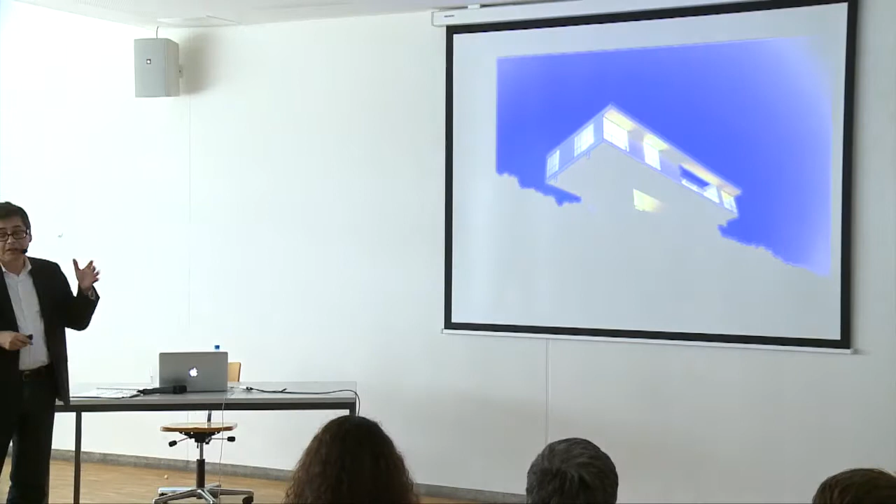To begin with, this is actually the very first house that we did in Los Angeles, on a very steep site - these are the pieces of land that you can get. We built a house that sits on two concrete towers. The two towers contain all of the infrastructure - power, water, heating - going up and down through them. The towers carry two steel beams, which carry a wood platform, and the whole house is framed in wood, the predominant way of construction in Los Angeles.

The house is covered on all sides, including the bottom, in Eternit panels. This is what the house looks like from afar. It's organized around a series of volumes that all contain storage - this is the garage, for example, or bathrooms - so that the space continues to flow around them, creating public and private spaces.

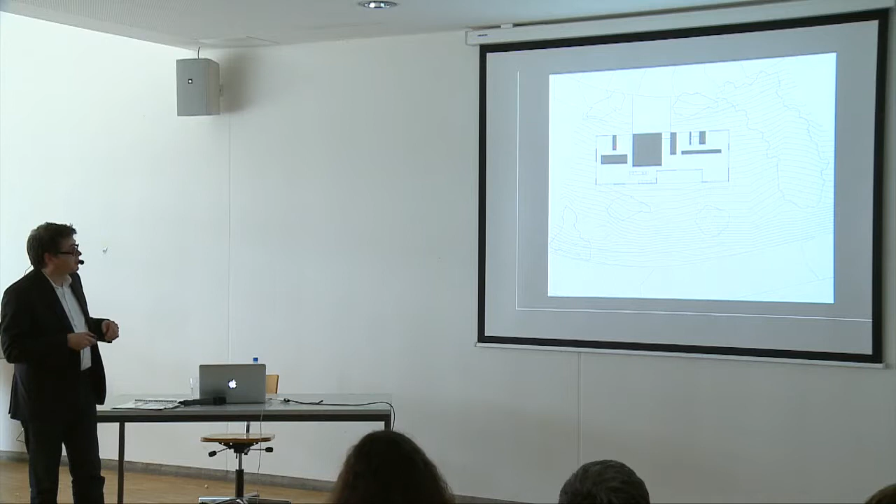Views of this public space from one end to the other. This is actually the garage. Again, these first ones I'm just going to show very quickly without going into too much detail.

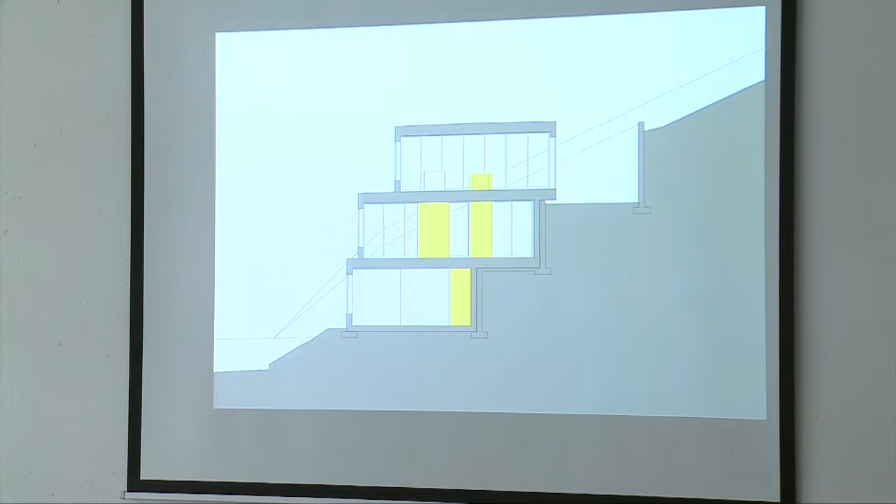A second house is one we did in Mount Washington for a young artist and an art historian, called the Sola Wright House - again a very steep site. Here we did sort of the opposite strategy: we excavated these steps into the site with concrete walls, on which we then laid three tubes. The tubes are entirely framed in wood, so there's absolutely no steel in them. The size of the tubes is dependent completely on the program.

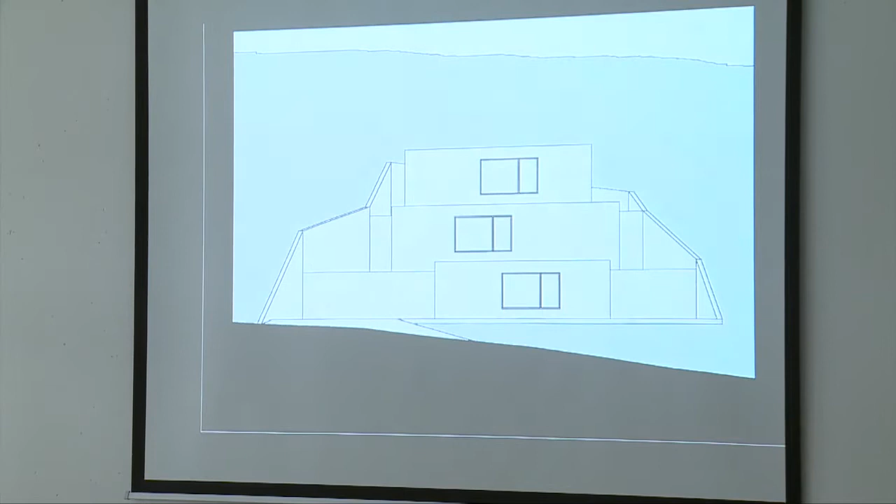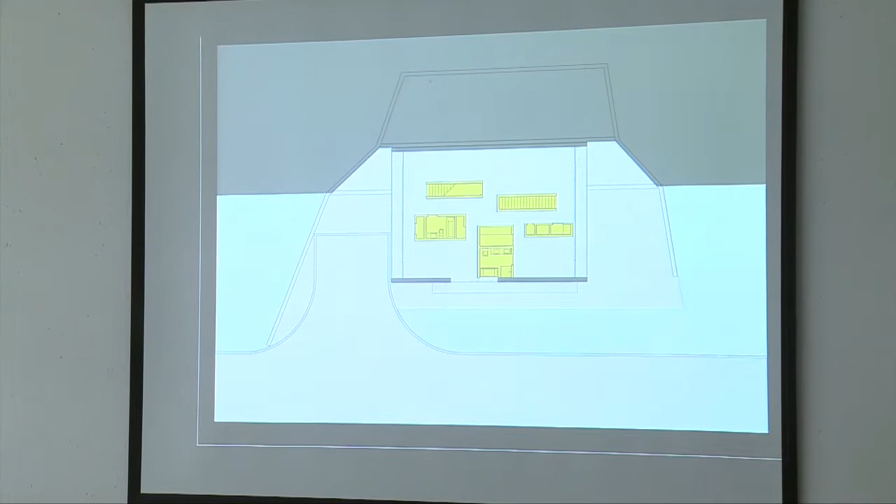The lowest level contains a garage, now used as an art studio. The second level contains a library, bedrooms, and again bathrooms encased in these volumes. You enter from the lower level, come up to this point, then move through the whole length of the building to the stair, and go up - so moving to the top of the house means you move both vertically and horizontally through the entire house. At the top floor, we have an open living, dining, kitchen space.

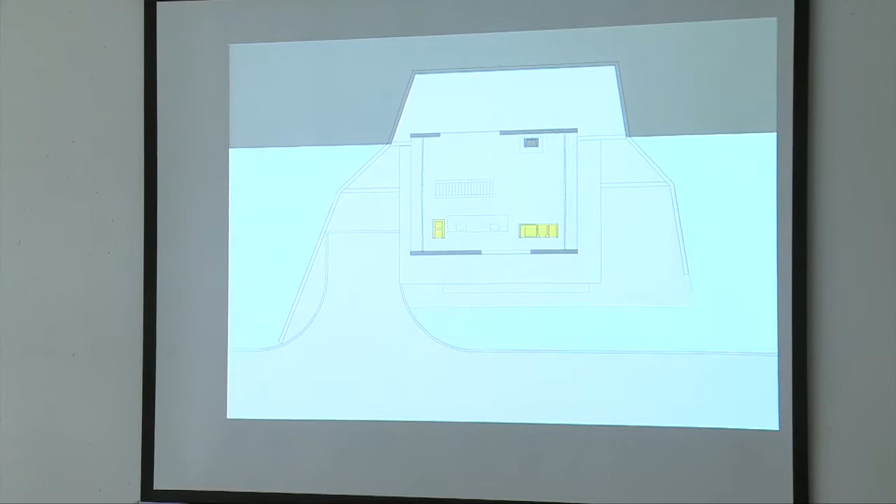These volumes contain infrastructure, they contain structure, and they are the shear panels of the building. Again very quickly: the approach, the entrance going up to the middle level, this is the hallway I showed you. The floors, ceilings and walls are all treated in white. The idea was to emphasize this tube, and within it we have these wood boxes set in there, floating in the space. Then at the top level, this living space.

A very recent house we did, which we call the house with 5 corners, on a very difficult site with very narrow access and very steep terrain. There's a level area, and you see this cliff. This is the site of a water tank that existed here for decades, and our clients bought this piece of land. Various restrictions from planning, distance from the cliff, distance from the lot line, and so on, actually dictated this overall shape, this form.

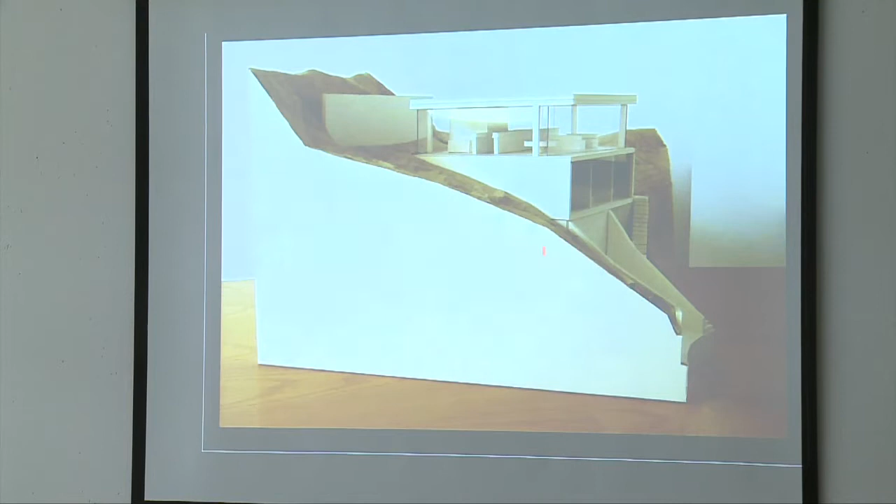Most of the house is actually underground, and all of that is poured-in-place concrete. At the top floor, we have a pavilion with 5 sides of glass, which is the living, dining, kitchen space. So this is how you enter into the garage, or you go up the stairs to this level. On this level, you have the 3 bedrooms that look out towards the view. Then on this top level, where you have access to the garden, you have this living space.

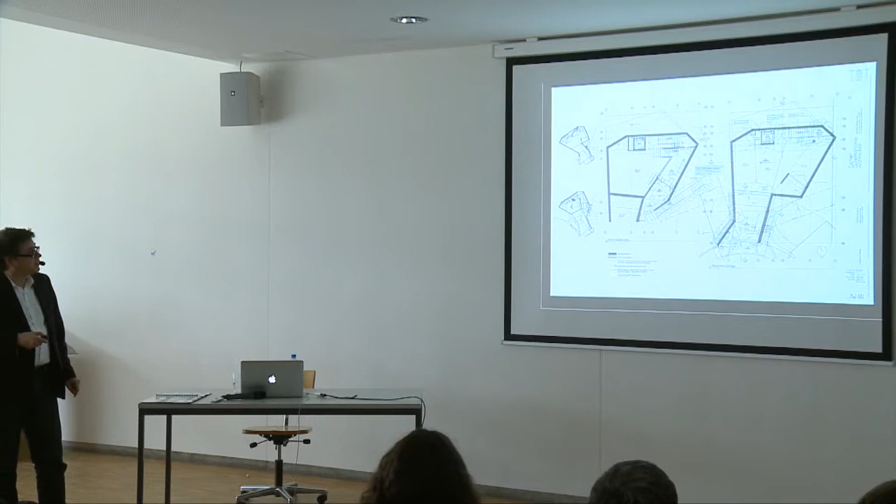Very quickly, the plans: again, garage, you go up the stairs. This is a mezzanine with the entrance that leads to a stair that cascades through the entire house. On the middle level, you have access to these bedrooms, which have access to bathrooms behind this core. And you arrive at the top into this dining, living, kitchen space, with a study here. The roof then sits on these 5 massive steel beams.

These images are very dark, but this is a view looking back. Going into the house, you see the contrast of the concrete versus the wood-clad inner walls, going up the stairs.

I'm not sure if they're extremely dark, these images, but I'm not sure if there's anything that can be done. Should you? Okay. You have to imagine them a little bit brighter.

So we go up the stairs to this middle level, view into the bedroom, up to the very top, and this top level where you have a view of the city. Here you would see this outline of the roof sitting on these 5 steel columns.

Another early project we did was actually a tanning salon, which I think in French is a salon de bronzage. When we first were approached, we thought, how can one do something like that? But then we discovered that the beds actually produced incredibly beautiful light, and different models produce different colors of light. We decided we were going to use the light as the only decoration in the whole space.

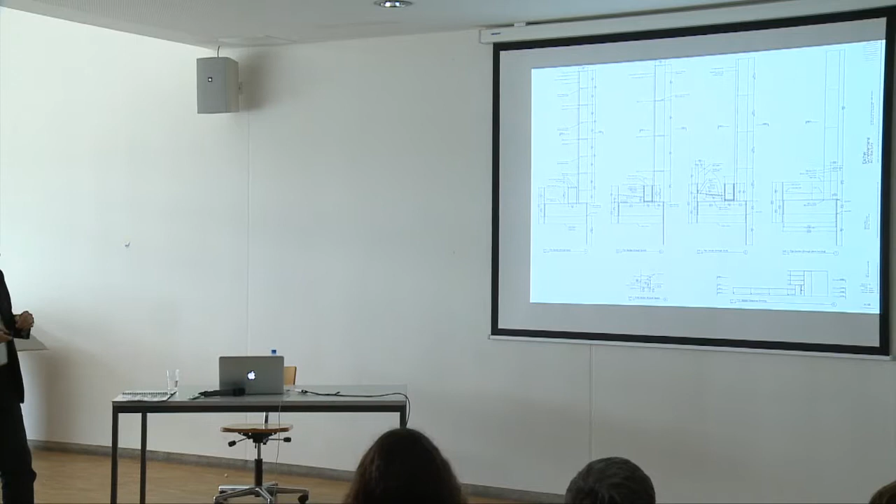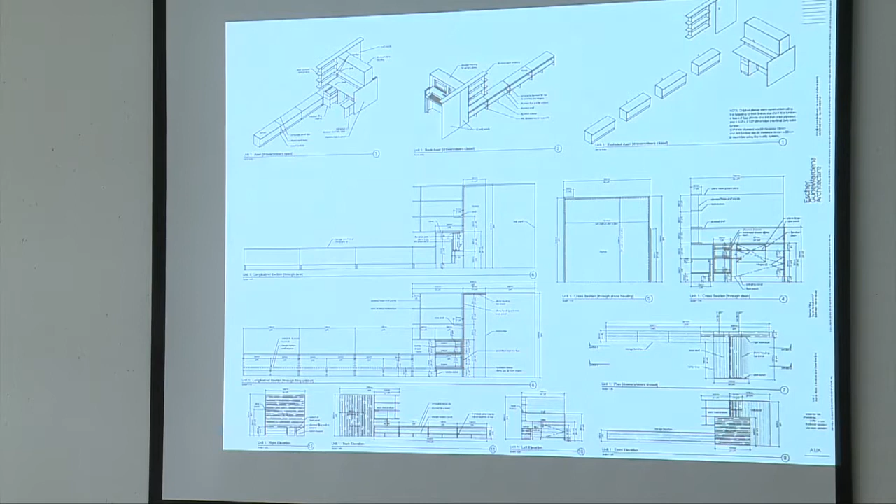Stephen Prina then first stained them in the way the furniture was originally stained. Rudolf Schindler had this idea that the furniture should, in a way, reflect the nature around the building, so these green tones, or silver-green tones, were slightly different from one house to the other. Once they were all stained, he painted them pink. So this is what they looked like in the end — he installed them basically as pieces of sculpture.

They were no longer defining space, no longer meant to be part of a building, but simply pieces of sculpture. He installed them on a very strict grid, determined by alphabetic order. Furniture from the Harris House preceded furniture from the Hyder House; furniture in the bathroom preceded furniture in the bedroom. He developed a very strict catalog and installed it on this grid.

This was at the Secession in Vienna. It was later shown in Los Angeles at LACMA as one of the Pacific Standard Time exhibitions dealing with architecture in Los Angeles.

Franz mentioned John Lautner—this is a very grimy picture of the Chemosphere. I started working on Lautner's work around 1992, a few years after I moved to Los Angeles, and edited the first book on Lautner. He died around the same time the book came out, and his family set up a foundation and donated the archive to it. I became the administrator for the archive, looking after this material for years until 2007, when it was acquired by the Getty, where it now is. The Chemosphere is probably one of Lautner's best-known houses, and it was acquired in the late 1990s by German publisher Benedikt Taschen, who asked us to restore the house.

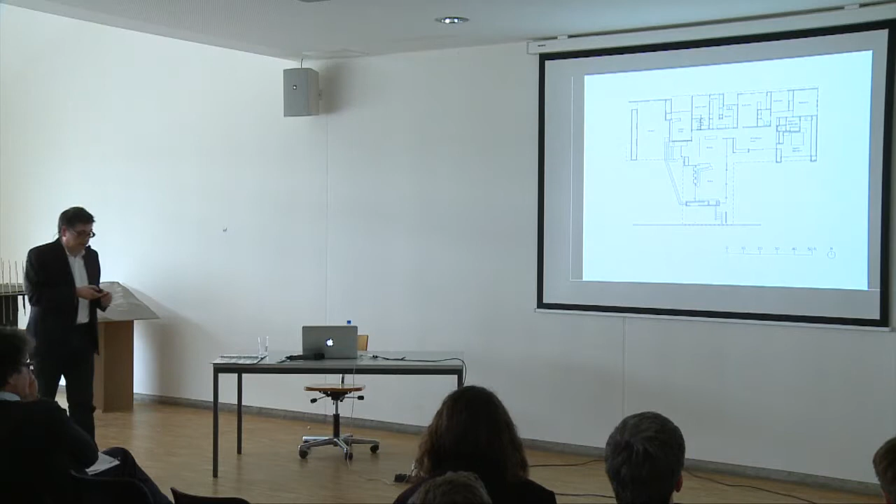The biggest change was that the house was originally designed for a family with a housekeeper, which was not how our client was going to be using the house. So this kitchen area, originally completely separated from the house, needed to be connected—you'll see that in a second.

Some of the work we did here was really restoration work. We had to replace all of the glass. We did not want dual glazing, but instead laminated glass. We had to replace flooring materials and some of the infrastructure.

This is looking into this living room space, looking back. Furniture had to be reconstructed, including the built-in upholstered furniture. And this screen here—you saw the black and white photo of it.

There were originally two of these screens, one here and one in the back, separating the dining room from the kitchen. This was one of the things our client needed or asked us to change. But there is this very important wall that runs the entire length of the house, this oak wall, and it was important to us to respect and maintain that.

What we designed was a 20-foot wide panel, part of this wall, that slides open so one can connect the dining room to the kitchen. This is what it looks like closed, and open. We redesigned a kitchen that was not meant as a kitchen for a housekeeper, but really a kitchen that was part of the living space.

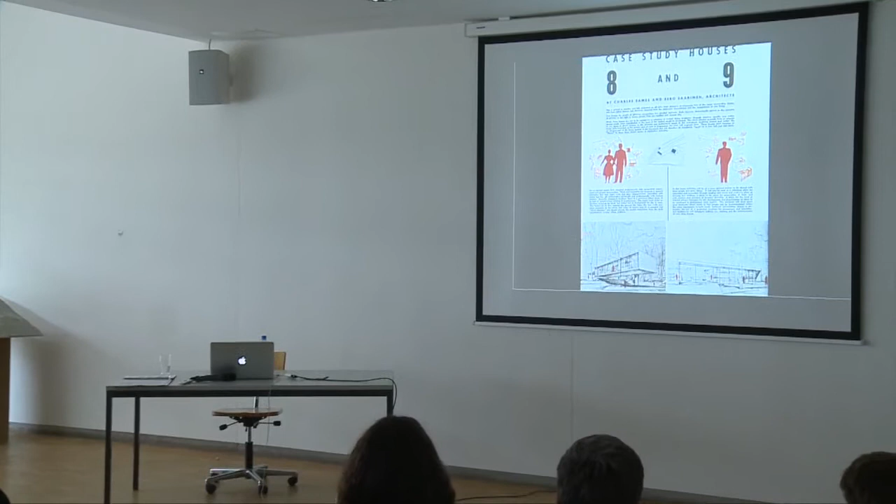Right next to the Eames House is the house John Entenza himself had. This is the site with the Entenza house, a collaboration between Eames and Saarinen. And this is the original design for the Eames House—originally they imagined it as a bridge cantilevering from the hill through this row of eucalyptus trees that dominated the site.

They didn't build the house for many years, and once they started, they realized this meadow was something very important to them. They repositioned the house and set it very precisely at the bottom of the hill, between the toe of the hill and this row of eucalyptus trees.

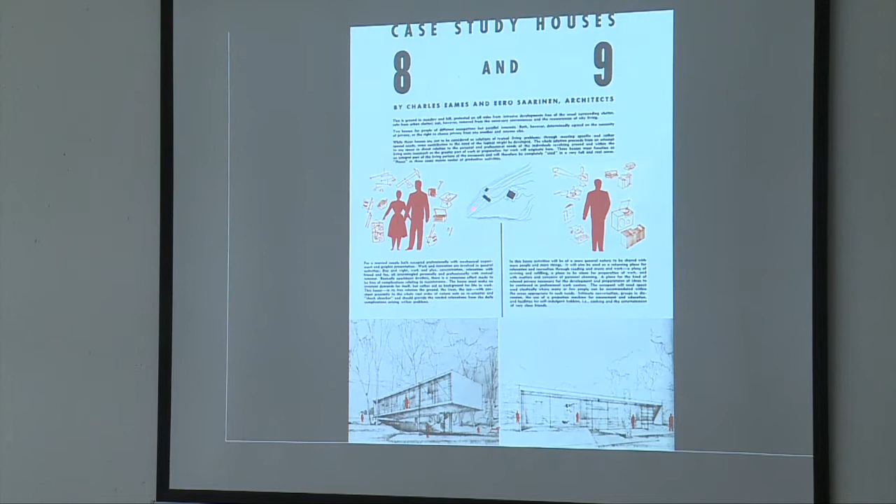This is the famous photo of the Eameses constructing the house, as it looked when it was first finished, and an interior view of the house. Now, the house, in its 60 years, had aged like any other house would age.

Though it was actually in relatively good condition, you have to remember that the house was very carefully designed, very carefully built, and very carefully lived in. The family continued to own the house.

Ray Eames died in August 1988, 10 years to the day after Charles Eames died. When she died, Charles Eames's daughter, Lucia, took over the house, and she is the one who set up the foundation that now owns the house.

The idea was really to preserve the house, which was something that at the time no institution would warranty. When the Eameses came to us to discuss the conservation of this project, we spent the first part just looking at this house very, very carefully.

We discovered in the house various damaged areas, of course, but we also discovered things like this. These are metal panels that have these sort of very delicate cracks and this crazing. And it was at that point that we told them that we should treat the house as if it were a valuable painting.

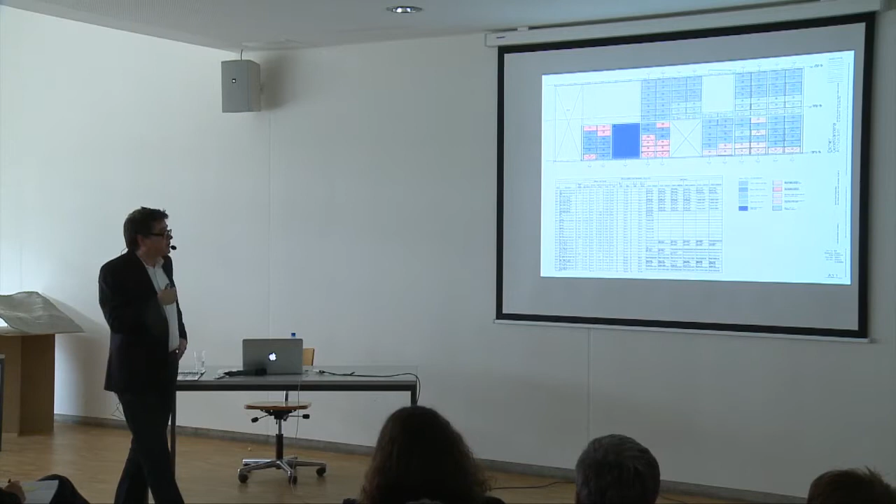In the 1994 earthquake that we had in Los Angeles, about 40 panels of glass were destroyed, and they were replaced. So in addition to these 4 different types of historic glass, we have three different types of relatively new glass.

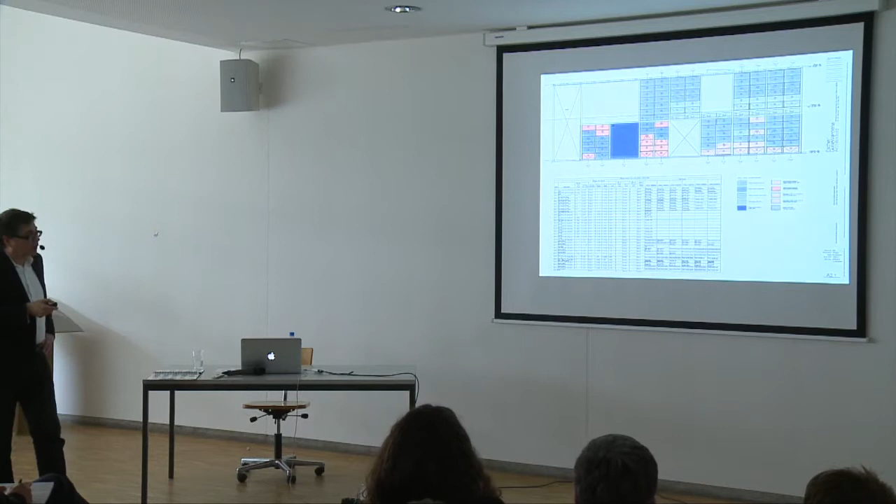So what you see here is mapping all of these existing types of glasses onto these elevations.

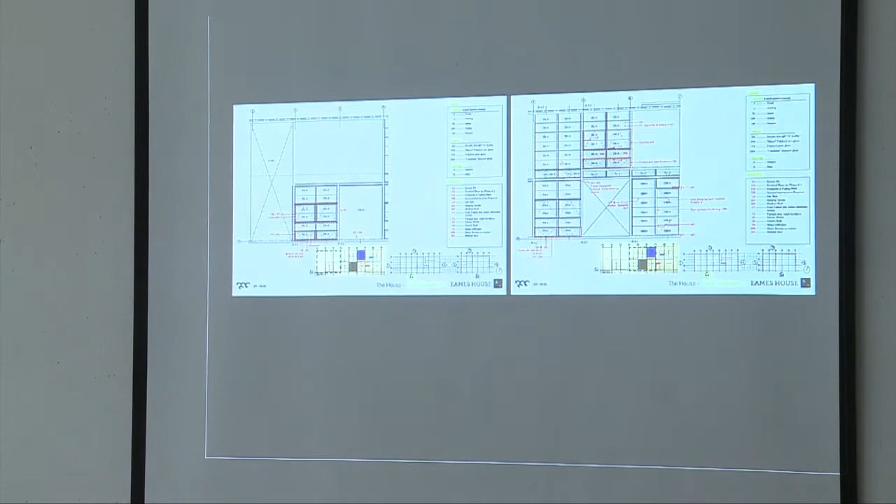We then also had these window studies done where we examined every single frame, the operability of every frame, the condition of the putty, the condition of the steel, which was then also transferred onto drawings. And then all of that information from these different studies was transferred onto an enormous 3D model that we created in the office.

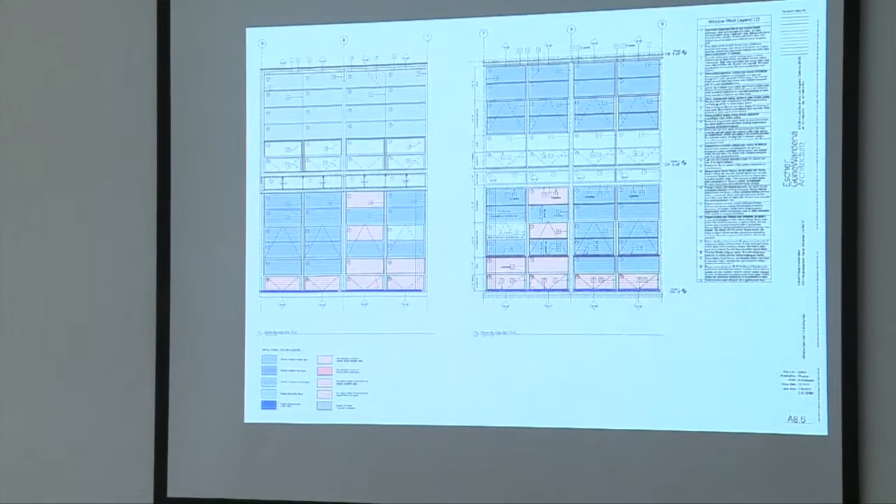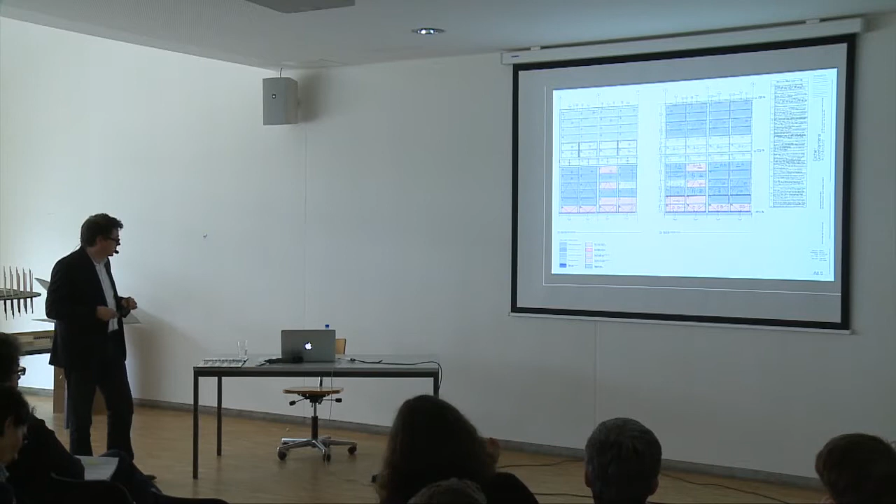This allows us to identify all of the problems with windows relative to all of the problems on other surfaces in the house. So this is just one drawing out of this very, very large 3D model that we have, focusing on the windows, on where we have cracks in windows or certain damaged areas in the window frames.

Here you see what I mentioned earlier, these windows that are combined by inserting a piece of steel into a curtain wall. These are the pieces that were completely destroyed, completely rusted, which we had to replace.

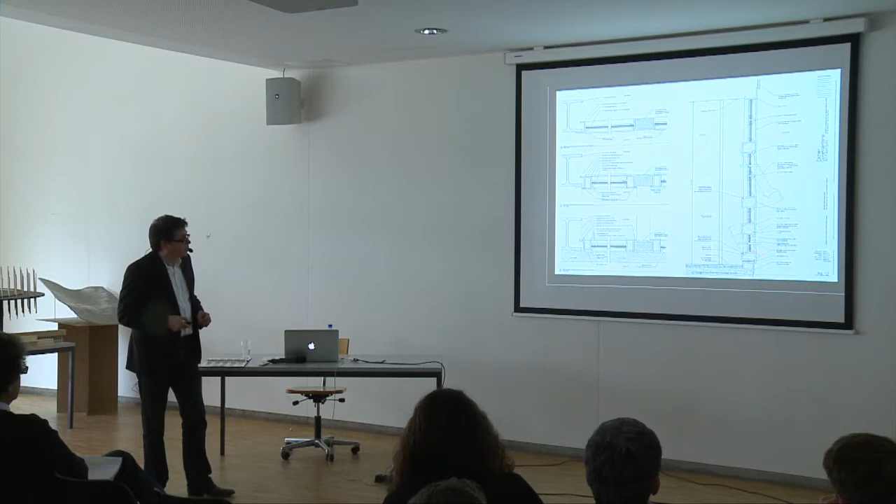We also introduced weatherproofing, which we had to install in places that would not be visible in a closed or in an open position, to increase the amount that you can seal off the building.

Now I have to say that in this first phase, the only work that was done was at the very bottom. This had to do with coordinating this with the installation of the new floor. It also has to do with the fact that the paint for the exterior is being studied, and we have to await this study to be able to then restore the rest of the facade and paint it. And it also has to do with the fact that the Eames Foundation actually has to raise quite a lot of money to do this work.

Now, all of this work on the windows was done pretty much on site. Here you see these sort of very corroded pieces being removed, built on site, recreated on site, and then being very carefully installed.

What you can see here is a replacement mechanism being installed that allows the windows to be held in a particular position.

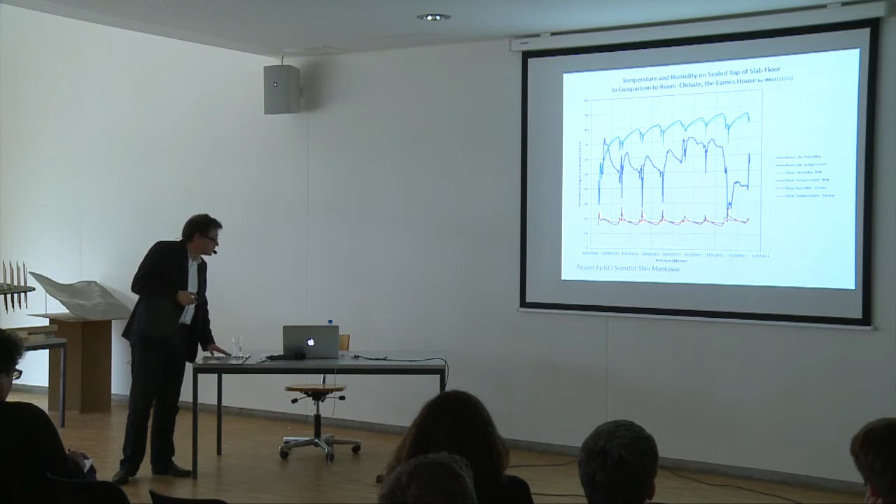So I will end with a project we are currently working on, which is an unbuilt house by John Lautner. This is a house that Lautner designed as a guest house to a house in the Hollywood Hills. The Lautner Foundation, as a matter of policy, has never allowed this before. The Frank Lloyd Wright Foundation allows that you can buy Frank Lloyd Wright plans and build this house somewhere else, but the Lautner Foundation never allowed that, simply because Lautner always designed a house very specifically for a site.

The house is deceptively simple. It consists of a series of semicircles—concrete block, glass, concrete—that are nestled and offset to each other. The walls underneath, below ground, slope outwards and are concrete. The walls above ground are concrete block and follow the topography, so that inside this space you have the concrete wall sloping out and the concrete block sloping inward that carries the glass.

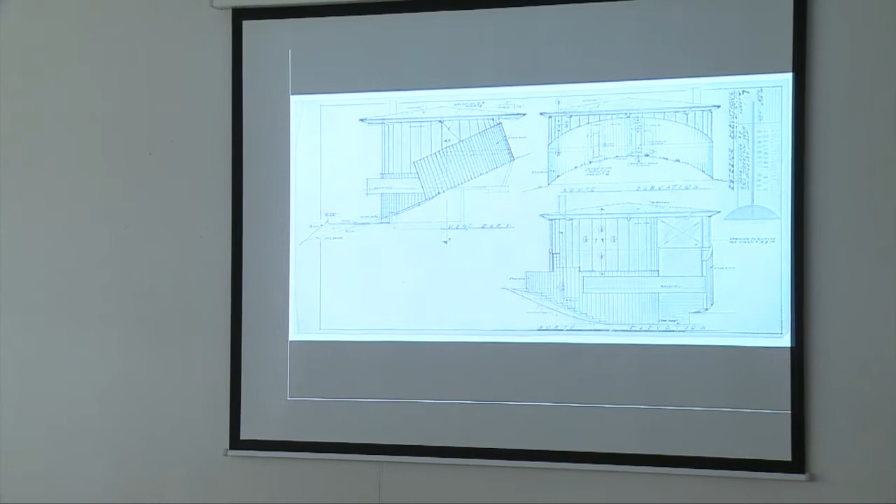The most complicated part of the project was really to update the structural system to what is allowable these days with the current seismic codes, because they have, of course, changed completely. We're working with a structural engineer named Andrew Nasser, who worked on about 20 of Lautner's projects. He's now in his 80s, absolutely brilliant man. We made some changes—pieces that were originally meant to be wood or steel. So this is actually a rigid steel frame that now carries the roof. We had to create bigger foundations for the building and so on.

The second major problem was the amount of glass that the house had, and making sure we could get this to pass with current, very strict California energy codes. To do that, we had to create an additional basement to offset the use. So this is the house we have been working on for about two years. We submitted it to the building department last summer. When we come back to Los Angeles, we have a very important hearing with the city that will determine whether this house will move forward or not. So we're keeping our fingers crossed.